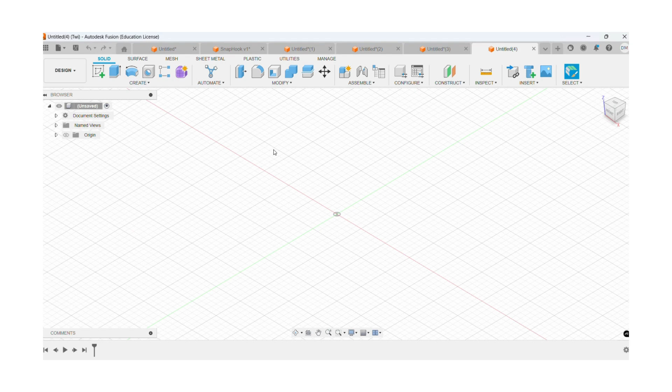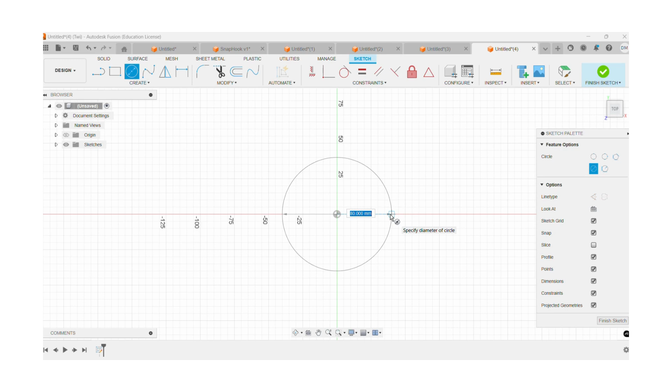We will start by doing create sketch. We'll use the top plane and define a center circle, and I'll define it for about 80. Then we click on finish sketch.

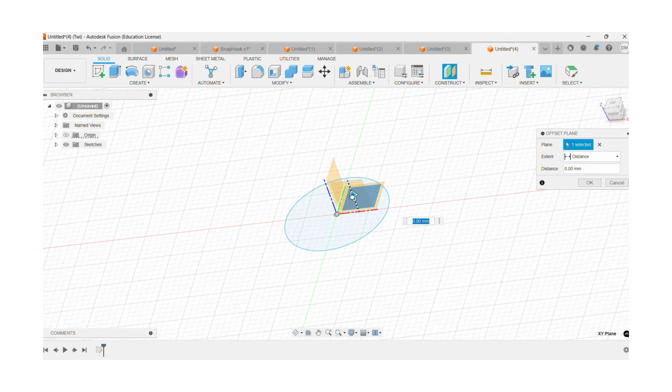We click on construct, and we create an offset plane like we did before. We click on the top plane and we offset for about 60 mm, and we click on okay.

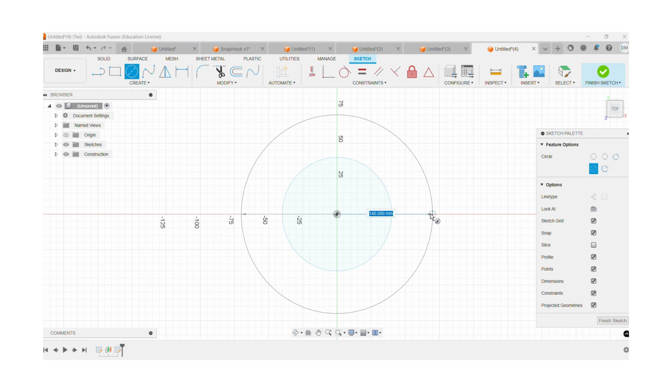Now we click on that offsetted plane, we create a sketch again, and now we do a bigger circle for about 140 mm. What I do after that is, again, I finish sketch, I click on construct offset plane.

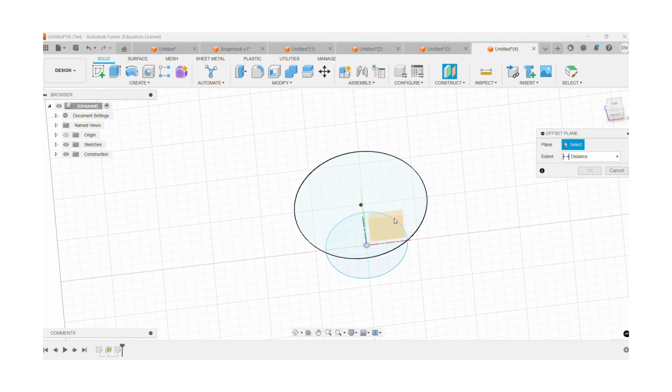I'm gonna click on the top plane again, and this time we will offset it by 120, because we offsetted 60 last time. Then you click on the offsetted plane, you click on sketch, center circle again, and you do 80. You finish sketch. Now you have 3 concentric circles on the Z plane.

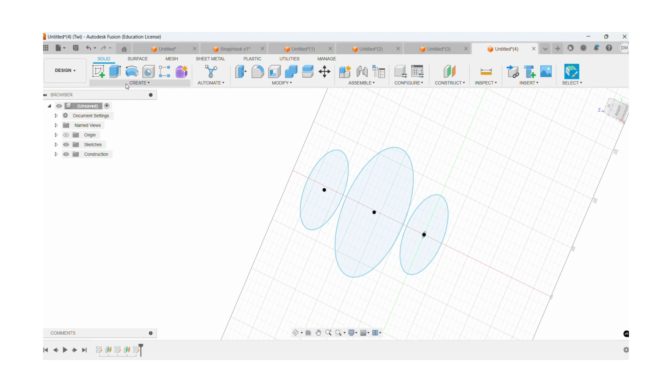We will now use the loft command under the create menu. I will create the first circle, the second circle, and the third circle, and I click on OK. This creates the main body of my lamp, which I'll call the main body.

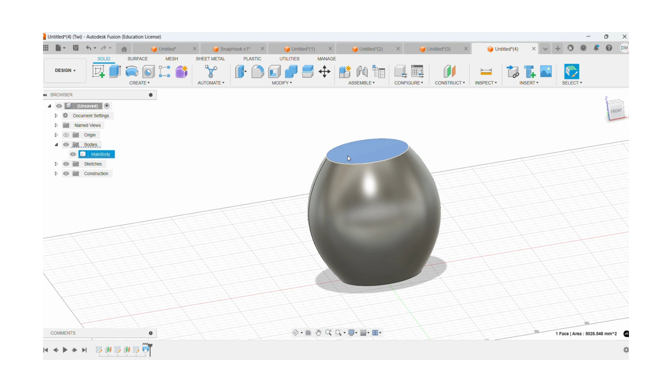Now once we've done the main body, I'll try to create the stand over the main body. So we'll click on extrude. We will do about 10 mm, and we will create a new body here, so it will be a separate body, and I click on OK.

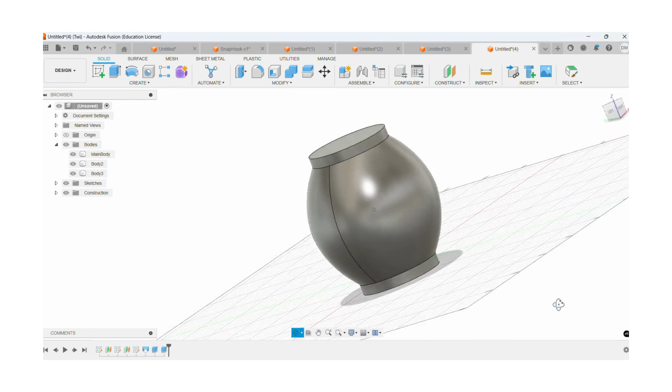I do the same thing below, extrude for about 10 mm, and I do a new body. So now we have 3 bodies: the main body, the top body, and the bottom body.

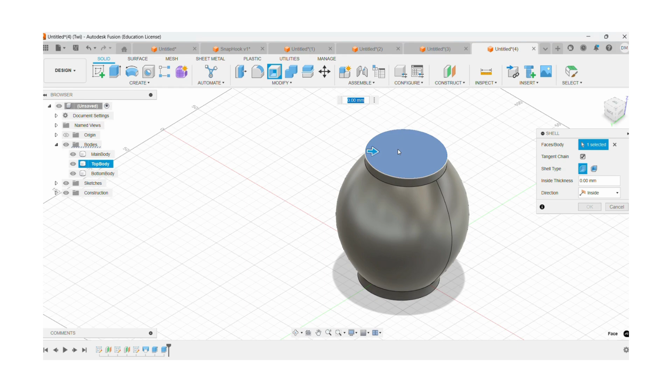I will first start by using the shell command on the top body. We will define the top body for about 1.5, and we'll do the same in the bottom body.

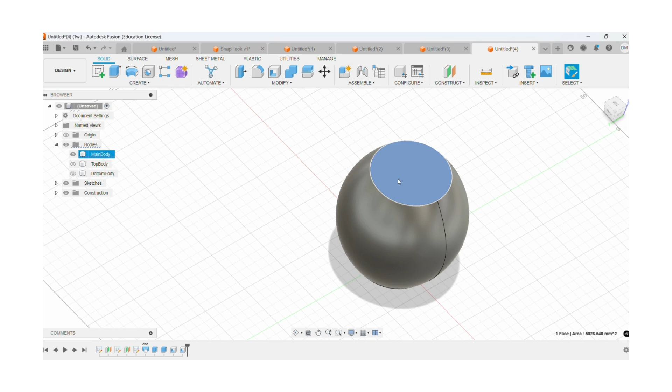This time I use the shell again and I do 1.5. So I've done that. We'll also have to shell again for the inner surface. I'll just clear the top and the bottom body, and we shell the main body, doing 1 this time. Click on enter, and we'll have to do that in the bottom as well.

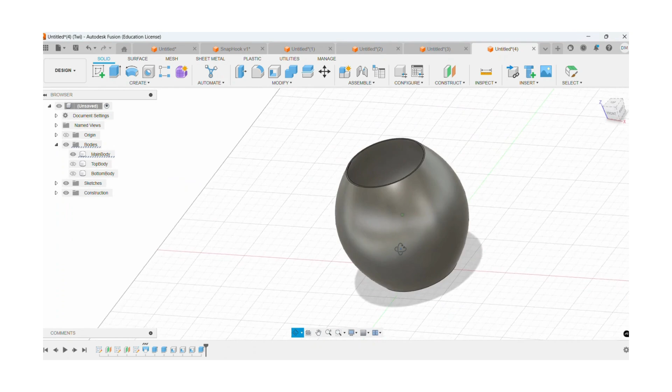More like we can just extrude in the bottom. We'll extrude a little bit, cutting. So now we can see a hollow surface. The main body is hollow.

We open the top and the bottom body again, and what we can do is add fillets to this surface. We'll add about 2 mm of fillet. Maybe you can do anything for fillet, but I'm just going to do 2 mm.

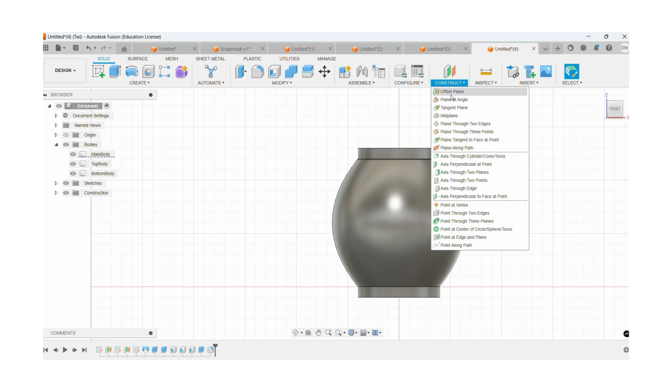I'm going to click on the front plane now, and now we are going to do patterns. The way I'm going to do patterns is I'm going to first offset a plane. I select the front plane, and I offset it at a random distance, and click on OK. Now we select the offsetted plane and we create a sketch.

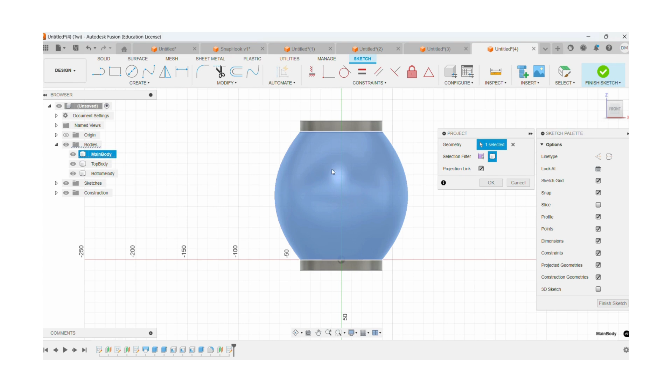What we'll do here is, again under create, project and include project, we will be selecting the body, the main body, and click on OK, and we will hide the top and the bottom body.

And what we will do right now is we will create some pattern. You can create any pattern you want - circles, ellipses. I will do a slightly elliptical shape, something like this. It doesn't have to be perfect, just any shape you can think of.

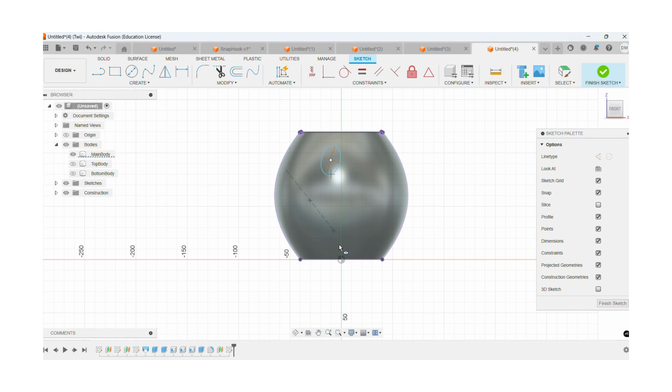I want to do something like this, and we'll make a bigger ellipse over here at this point. Something like that, right? And then I will mirror that over here.

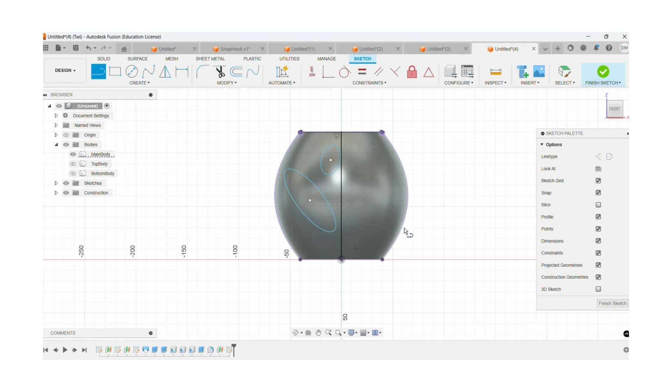I will first do the mirror command. So first we will select these 2 points, and then we will mirror them. We will select this, and we will select this. We haven't defined a center point, so we will draw a construction line from there to there, and we'll make it construction.

Now we can easily mirror, right? So under the create menu, mirror, we select both these planes. Mirror line is going to be a construction line, and we select okay. So with that, we have sort of a pattern. This pattern looks really odd for some reason, but you can make your own patterns, don't worry about it.

I will probably also add a circle, because why not. Once we're done with that, we will do finish sketch. So now I have a bunch of, and I don't know why this is defined as construction.

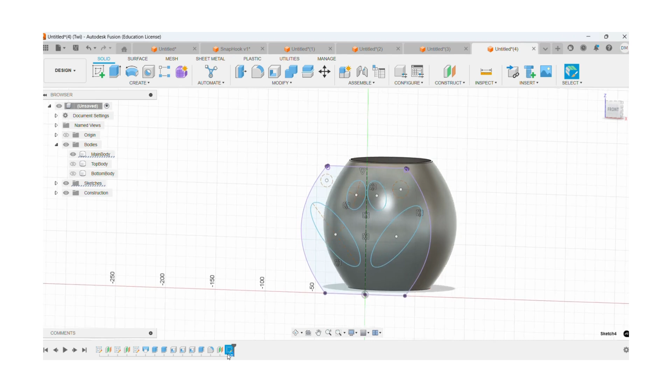They were defined as construction — those are not construction lines. We'll finish the sketch, and what we'll do right now, since I've defined the pattern.

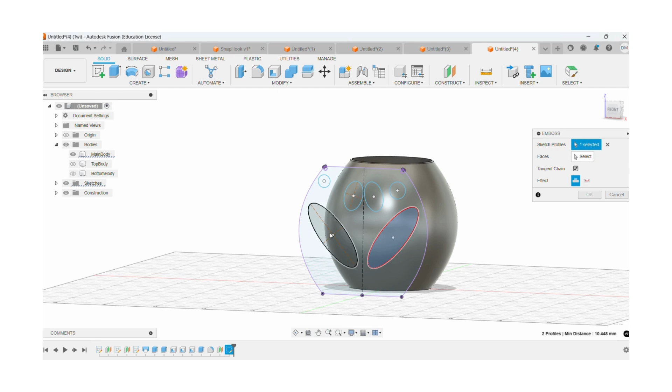I'm going to emboss this under create, the emboss button. So this time, instead of selecting all these profile planes first and doing the emboss, I'm going to do something called deboss, which is going to kind of push it in, if that makes sense.

We will try pushing a little much, maybe about 10 or something, and we'll see how that works.

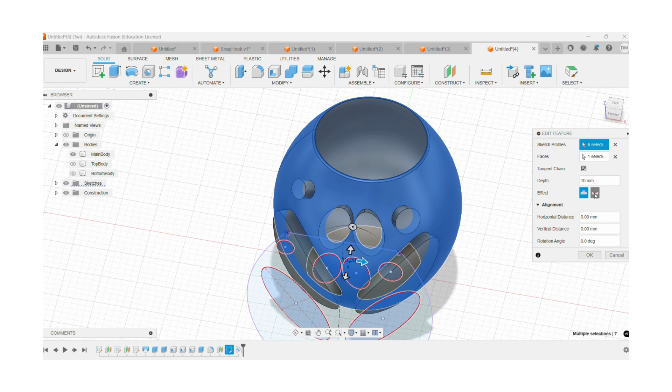All right, and we will do deboss, and we'll see how that works. I'm not really sure if it'll work, but I think it came out all right. The pattern is not nice, as I said, but I think it is all right. I am not too sad about it.

So once we've defined a basic pattern, what we can do now is go under create, and there's something called pattern there. We can do a circular pattern, and select the deboss which we have done previously.

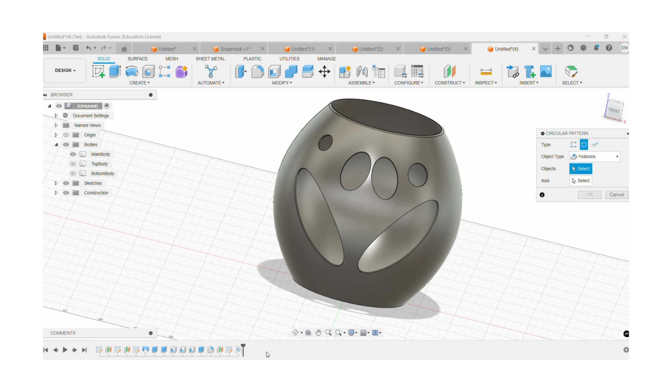And once we have done the deboss, one second — we need to do features, not bodies, because deboss is a feature, not a body.

So we've selected the deboss feature, and now I have to select the axis. I'm going to select the z-axis, and that's a lot of patterns.

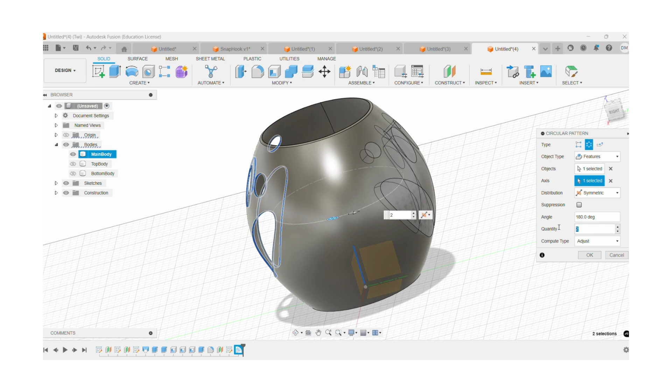We'll try reducing the quantity. First I think we will try making it symmetric, and we'll try adding 4, we'll see how that works. I'm not sure if that's going to be okay — that's too much, I think it's way too much, so we will just do 3 or something.

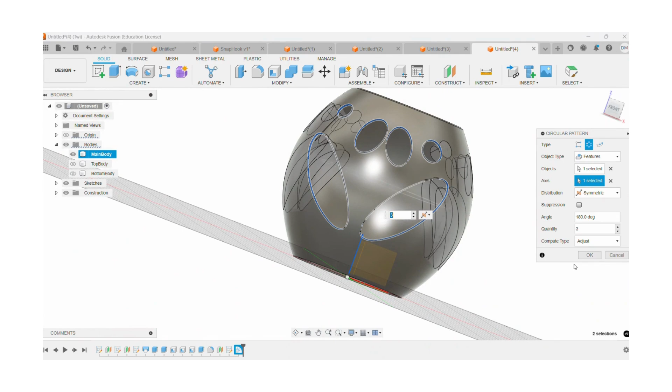I'm not particularly fond of this pattern, but it's not the worst, I think, so maybe we'll just be happy with it. Alright, I'm just going to click on OK, and it's constructing it, and there you go — that's our pattern, and that's how you do the lampshade.

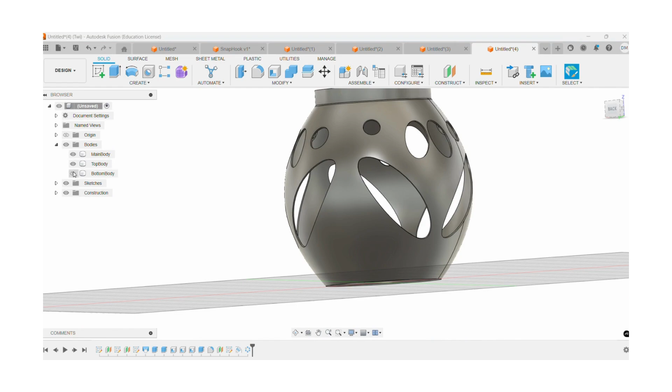You can select the top and the bottom bodies, and I think that's about it. Honestly, we've created everything. So what you can do right now is, of course, add appearances if you want to — you don't have to do the appearance part, but you can always add it.

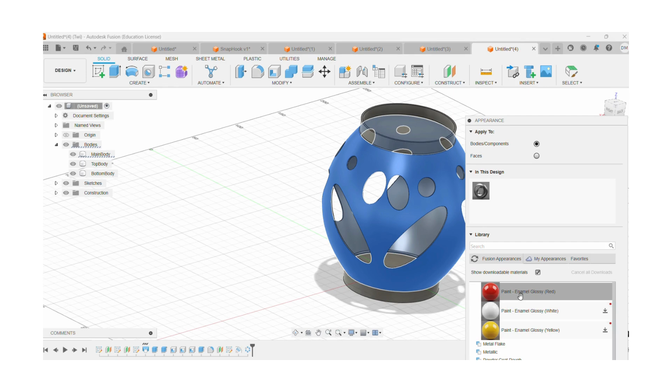I'm just going to add one color or something, I'm not going to do too much, but I thought we'll add a little bit at least, you know what I mean? Probably add like a black, a powder coating. And for this we will add red and red, and there you go, I think that's about it.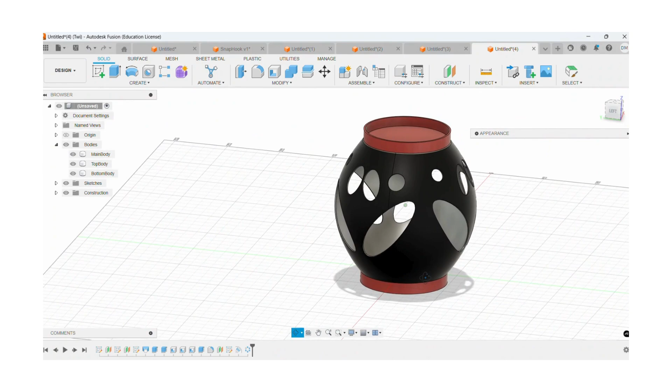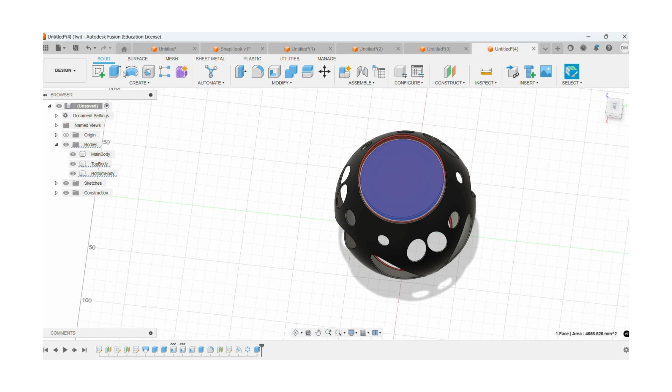So that concludes our lampshade. One thing I want you to consider for the lampshade is that now you'll also have to make a hole here. I did not notice, but you will have to make a hole there — now it looks a lot better. You'll also have to do the same thing above. I forgot to make these adjustments early on, but I think now it is perfect, right?

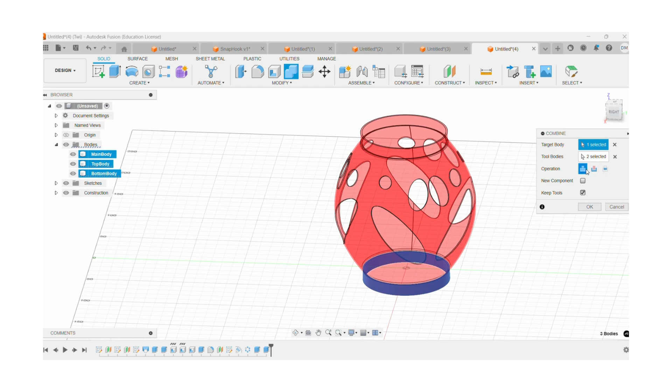Now one thing you have to keep in mind is always try to join these bodies when you're done with everything. So that's my top, bottom and main. Since I'm done with everything, I'm not going to make any changes, I'm just going to select all of them. We're going to go on the combine button, and we're just going to do join, and that is going to be my main body. So we're done with that.

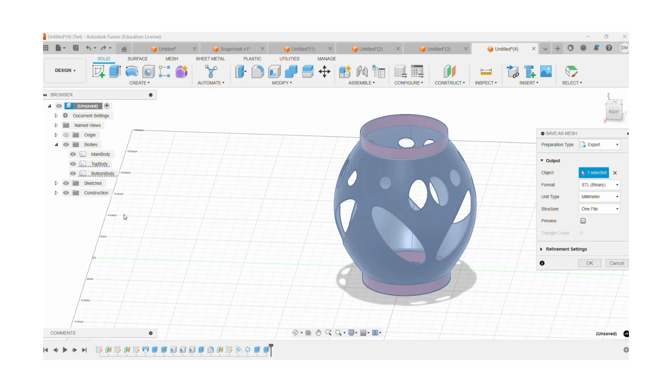What we will try doing now is exporting this as 3 separate files. If you want to export it as STL files with different resolutions, you'll have to first select the main folder name and right click on it, click on the save as mesh button, and select STL binary here. You can also use ASCII, but that's only for when you want to review the file — printers usually prefer the binary file.

And you click on the refinement settings, and here you'll see that there's high, medium, low, and custom. These are 3 different settings which you'll have to take printouts for if they ask you to generate STL files with different resolutions. I will just do the high resolution for now and see how that works out.

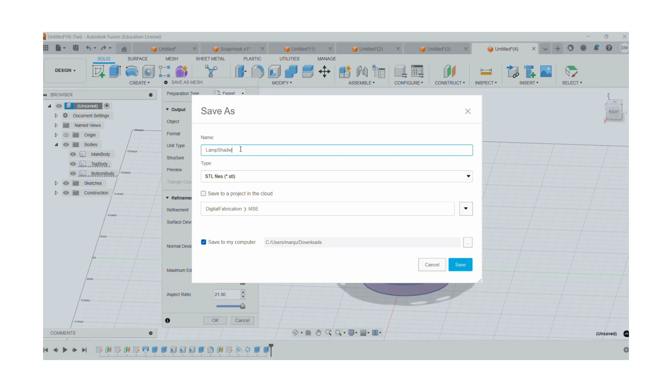We'll click on OK, and I'm going to save this as lampshade — oops — lampshade and high, right? And we'll save that, and you'll notice that it is saved in the directory as lampshade high. You can do the same thing for medium and low, and that's how you generate STL files in different resolutions.

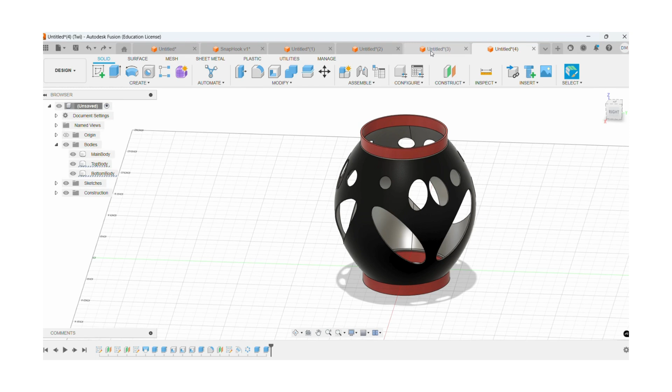In fact, you could do the same thing over here for this keychain. You could also right click on this, click on the export button, first save as mesh, and STL binary, refinement settings medium, low, or custom, and export it in the same way. So I think that concludes both the lampshade and the keychain.

Next we will try doing the nut and bolt probably, and we'll see how that goes. Thank you.